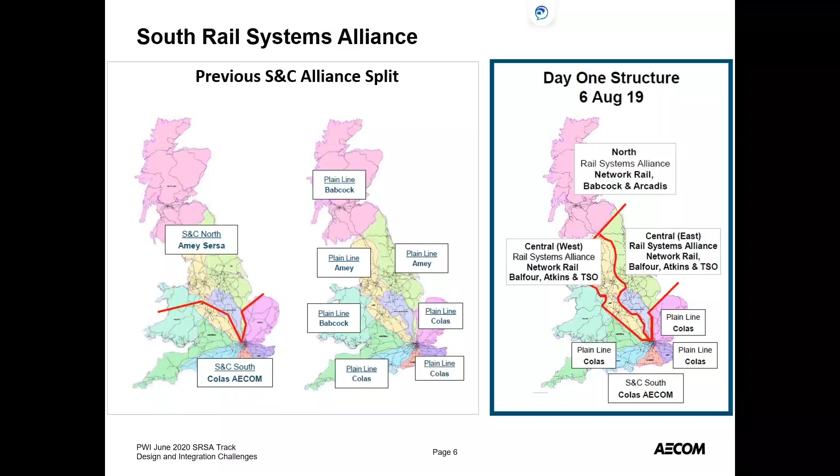However, our work bank is still pretty big, and we have a strong team to cover the area.

As I said, systems is the key there. In terms of SRSA, we don't just do track design - it's now OLE design and install, off-track works as well. We do some embankment works, drainage, EMP, M&E. So we are multi-skilled, and this is good because we are one of the teams of choice for our stakeholders due to the Alliance's multidisciplinary engineering expertise. We're basically a one-stop shop they can come to for their design and construction solutions.

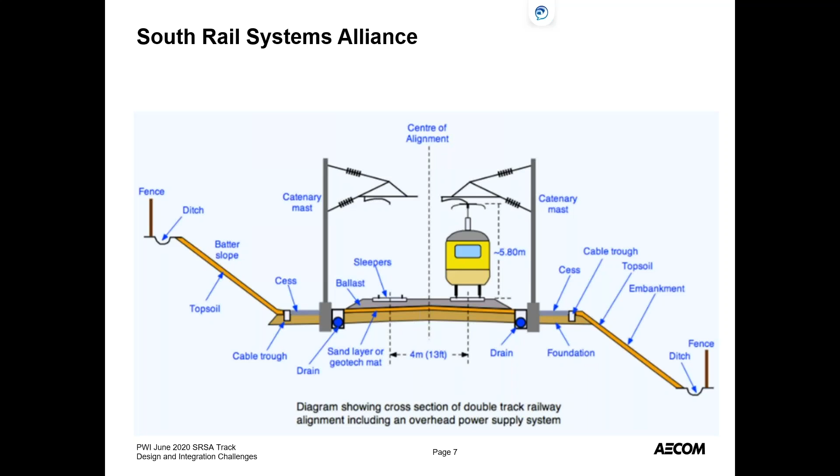We've already had 5 years under our belt as the S&C South Alliance, delivering about 800 S&C units. Our next two control periods, CP6 and CP7, the next 10 years, involve more complex track and enhancement schemes. I personally feel this is because we've tackled a lot of the low complexity projects during CP4 and CP5, and now we're tackling a lot of the higher complexity projects and enhancements going forward into the next 10 years.

Typically the S&C Alliance is led by the P-Way team, with the other disciplines circling us. So we lead signalling, civils, electrification, power, and third rail teams to produce an integrated design, again as a one-stop shop.

Quick view of our work bank - for the S&C South Alliance, when we won control period 6 and changed to the SRSA, our work bank through the control period headed up to about 553 units. That's our target going forward, and you can see by the amount of jobs we have, we've already delivered over 100 units in CP6 year 1, all successfully - there were issues, but we've delivered them successfully with no overruns. Into CP6 year 2 delivery, again over 100 units planned, and design is pacing ahead both in the west and in the east with the South Rail Systems Alliance.

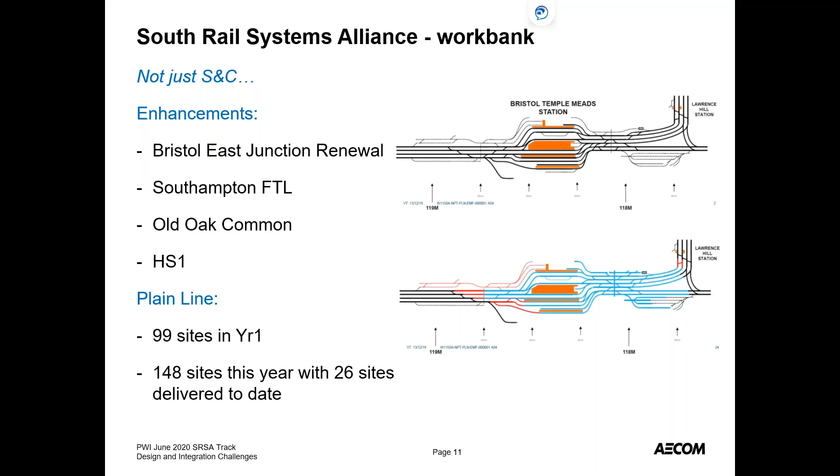We now cover enhancements, plain line, and are the team of choice for our stakeholders. Primarily we are there for track renewal, we are known for that. Where possible though, we will see if we can do some line speed improvements, some heavy refurb work as well. The term 'like for like' is used far less, and as the rail industry seeks efficiencies in delivering a better railway and putting passengers first, we need to adapt to the new initiatives our customers want.

We also provide opportunities to remodel S&C, providing greater operational flexibility and capacity, longer trains, longer platforms, and signalling flexibility, all designed and integrated as an SRSA product. So that's the background, that is SRSA. Hopefully that tells you how we have changed from how we were in the S&C Alliance to how we are now as a systems-focused delivery unit.

I'm going to go through 3 examples of projects that I've been particularly involved with to date, with some of the issues, opportunities, and solutions we have put in place to successfully deliver these projects. So Southampton Freight Train Lengthening, a project that's been happening for a while, a few years now.

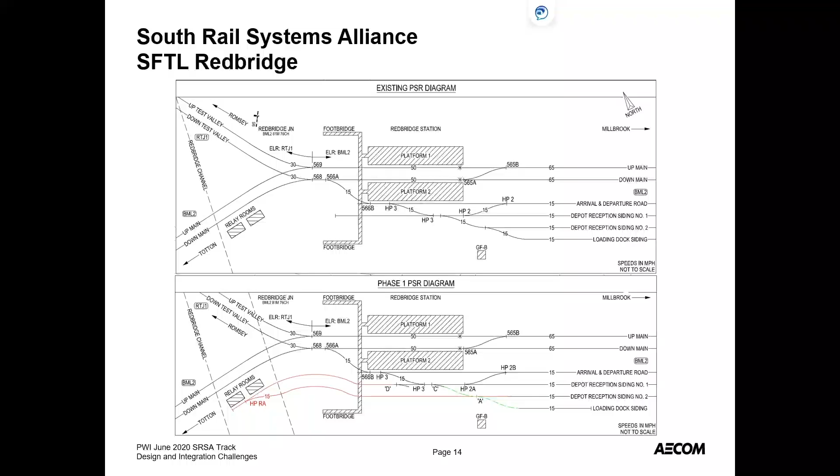To enable the doubling, there are a number of constraints, including existing land. There's existing land to the south of the site, so we had to do some de-vegetation work. And because we're redoubling, we've also had to put in new lighting columns, a new fence line, which you can see there, and as I said, the new hand points.

A bit more detail on some of the constraints we had. To the south of the existing footprint there's a park, so there's a park just to the south, and Network Rail had to buy some land to get the second line in.

Siding number 2 to the south - we had the new line, new Network Rail boundary, new fence line as well, and there's a lot of constraints in terms of space, but also existing equipment in the area. There's an existing electrical substation, and as soon as you see that, you know there's going to be some kind of cabling coming from it. And in fact, you go to site and there's a number of cable troughs littered around the area.

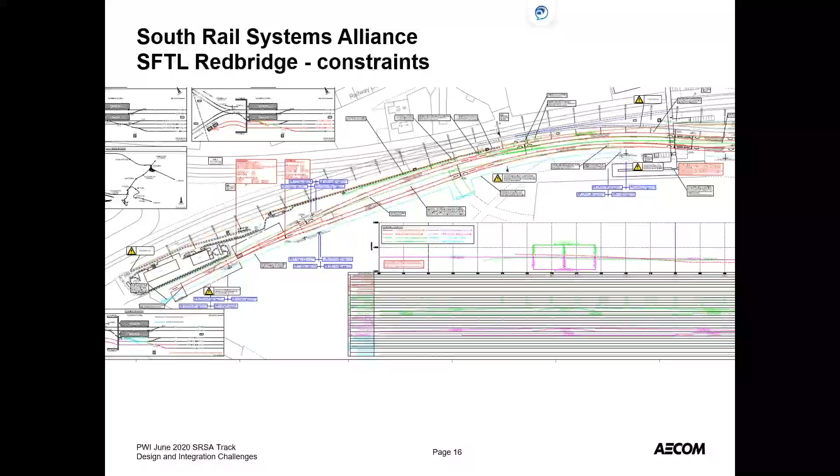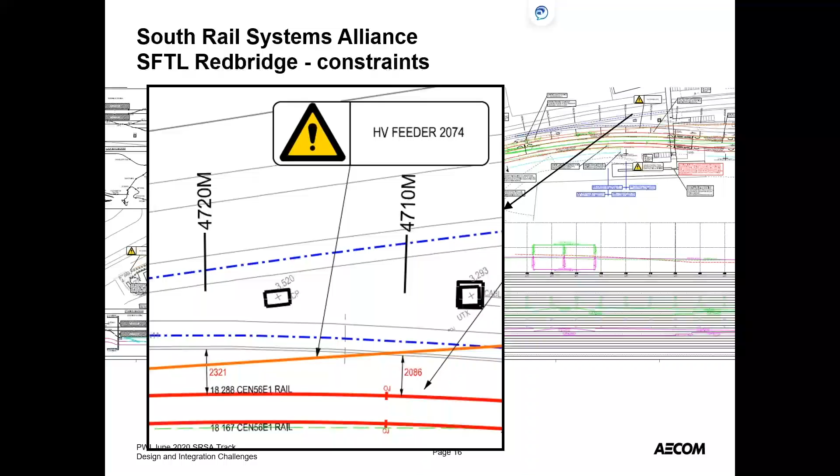As part of the Form A design, we identified that there was an HV cable running from the substation very close to the track alignment. With that, we put a hazard on, and that hazard had to be taken forward into Form B design, detailed design, and then into construction.

Okay, Paul. Okay, I cannot hear Paul. Hello, is that better? Oh, that's better. Excellent, go for it, so sorry. Goodness, cool, all right, yeah.

So what I was saying to myself just a moment ago was about Southampton. I think what's key to remember in this job is that Southampton has been going on for a number of years, with different organisations working on the design, and within those organisations different people have come and gone. So there's a lot of knowledge out there in the job, and not necessarily all of it stays with individuals. It's about the importance of documentation.

This issue was identified, and rightly so, in the Form A documents prior to me joining the company and taking the job on, but did result in some issue at the end. We did a bit of an inquiry internally to work out what we could have done better, and I thought I'd share a couple of things with you on that.

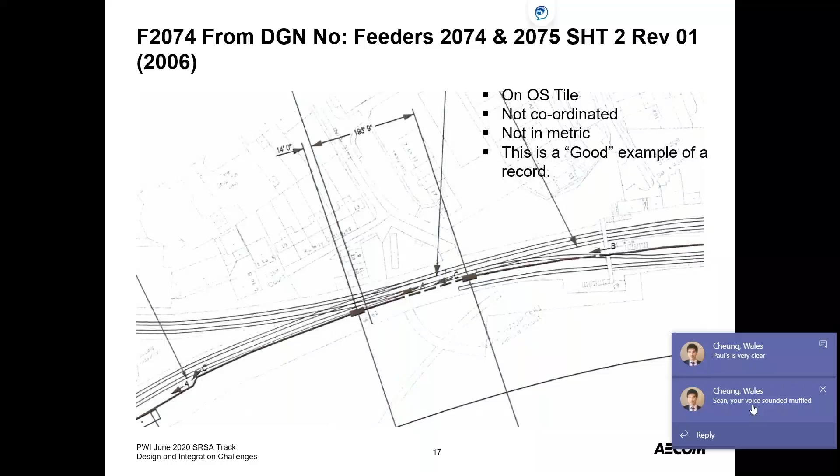Now, the issues with record drawings, especially as you move away from signaling to some of the other power disciplines, is that record drawings... Sean's taken away my presentation. It's all good. Record drawings are only as good as the people drawing them at the time. Signaling is quite critical - they're all critical, but signaling is significantly critical.

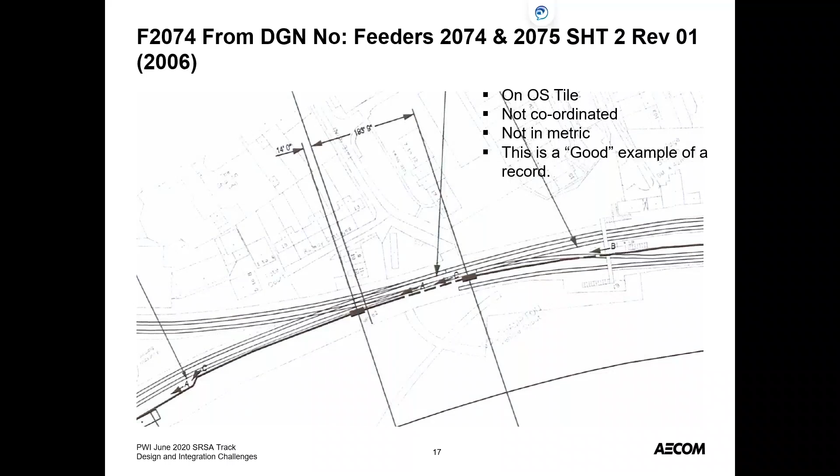The quality of the records varies depending on age, but they can be very, very good, and we do a lot of correlation to make sure they're totally spot on. With some of the power records, they can be good, they can be bad. This is considered in the discipline as a good example of a record, but even so, it's only on an OS tile. It's not coordinated. The geometry is still in feet and inches, and it's not really what you need when you're trying to measure things to the millimeter.

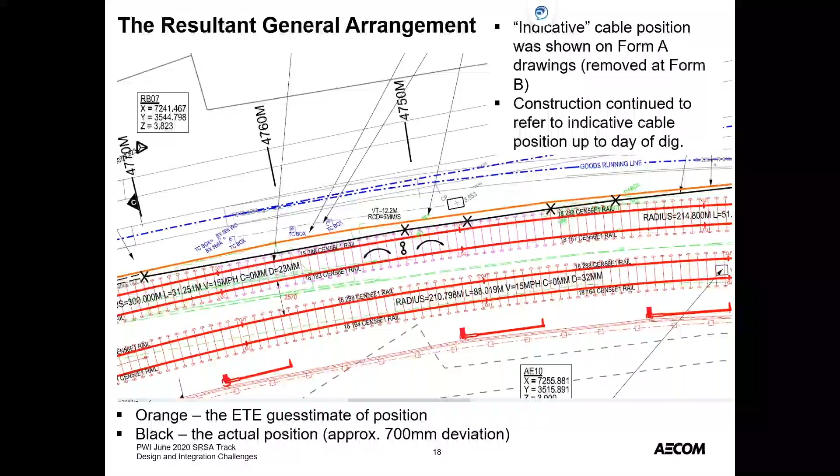So, in good faith, we had put the position of the cable, marked in orange, based on the record information. The line in black represents the actual physical position of that cable. The cross marks are where we eventually dug it out to find exactly where it was, and those are the positions we surveyed on the cable itself. You can see there's a bit of a drift - about 700 mil, 600 mil towards where we want to put the new track, where that cable was actually found. As track engineers in particular, millimeters can make the difference. As it was presented in orange, it might have been something that could have been avoided - you can limit the dig off the sleeper ends and potentially avoid the issue. Where it was actually found was within the ballast shoulder, and action needed to be taken.

So for us, we raised a close call against the design because we needed to understand how we got to such a situation so late in the day. A couple of things came to mind when we were looking at that.

In the event we had not undertaken those investigations and we'd put a bucket through that cable, it would have been a reportable accident and would have probably resulted in an HSE investigation. But beyond all of that, we could have run the risk of seriously hurting or killing someone in that action. As a slight aside, if you go to the HSE website, there's a brilliant video showing what a cable strike can do and what it looks like - it's not pretty at all. So burns would have been the obvious injury all the way up to death as a possibility had we not taken action prior to this moment.

If you think about the impact on the system, we've been talking a lot about systems. We're no longer a track renewal outfit. We are responsible for the entire system. A cable strike, had that been a signaling cable or a telecoms cable, could have caused significant disruption over a large geographical area. And there's third-party telecoms to be considered as well.

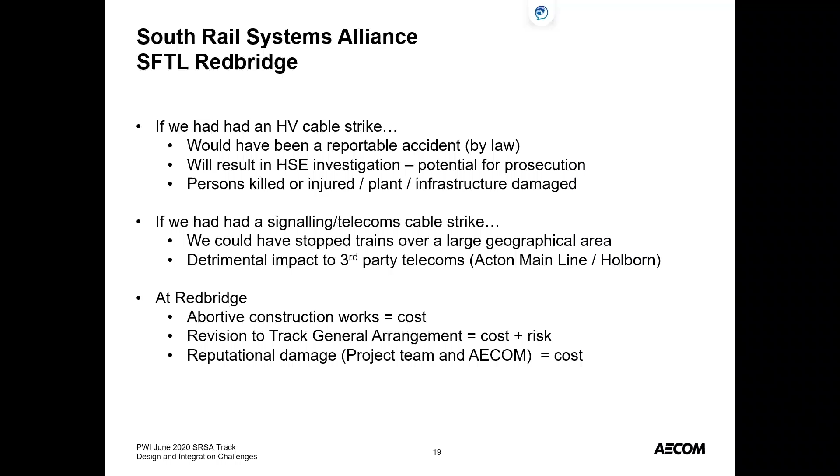And then there's reputational damage as well. When that came up, I am accountable at the time because I was the CEM. It is my fault. People said some words to me, and in the heat of the moment, they were totally valid. But it's about reputation. So the old adage of measure twice, cut once, definitely applies. Check and check again. So if we could go to the next slide.

So the lessons learned kind of bear that out. BIM and CAD ownership, it's just something we still debate this internally in the Swindon office. The track drawing has always been referred to as a general arrangement, and dependent on the complexity of the jobs, we end up picking up other people's details, and rightly so. So a cable detail, as we were showing, that would probably sit right on a track drawing because it has an impact on the track activity. But we find ourselves as track engineers the custodians of a general arrangement that takes into account everybody else's design elements.

And again, as we move from being a single discipline activity into a systems activity, we've had to rethink our BIM and our CAD strategy to say, well, do we need to, for smaller scale projects, be bringing in like a Master 500 or some sort of global referencing model to be able to manage these issues rather than it all sitting in the track design. That's something we've been looking at going forward to try and avert these issues. Again, geospatial correctness is absolutely critical. It's a millimeter science with a lot of what we're doing, and we need to make sure things are correct that go into these models.

And again, we must resist the urge to show uncorrelated information. Everyone feels it's the right thing to do, and it is the right thing to do to highlight these risks. But as I've put a point a couple of lines down, if you think about advertising, advertising is so powerful. You can stick an image up on a tube, or on a station platform, or on a bus stop, and that image, whether you're consciously taking that in or not, it goes in your head. And it can affect how you think and how you see things. If advertising didn't work, they wouldn't do it. It clearly works, and it's very powerful.

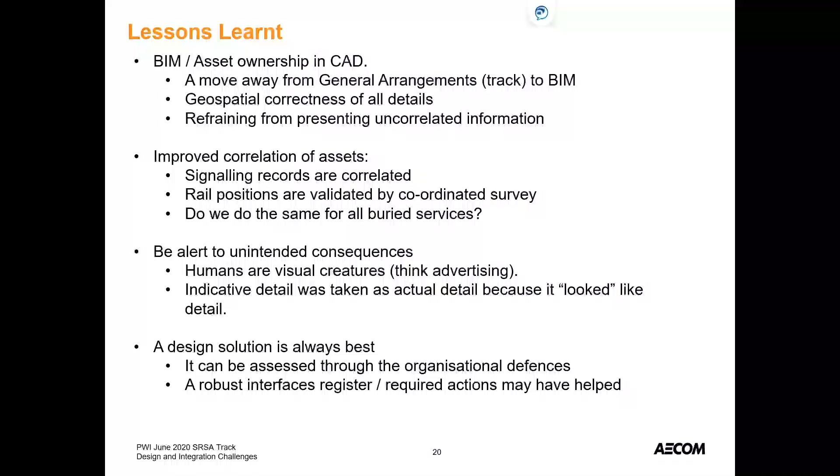Okay, so that's Southampton. As I said, lots of lessons learned from that that we've taken forward. The next project is Newport Station East. This is about good design versus compliant design - two different things that came out from Newport for me. So Newport Station, let's hopefully go to the next slide.

There we go. Okay, so Newport Station, this is a job that we installed at Christmas - two crossovers and a lead. All in NR56V.

Trying to do a like for like, in inverted commas, on through bearers, but not modular through bearers. We're allowed to do some alteration to the layout, but we had to also stick with the signalling system and current operational moves - they had to be maintained. We had to do some line speed changes to accommodate the track alignment, to improve the track alignment. The biggest issue or constraint we had was integration with the Great Western Project, who was still finalising commissioning of the electrification through to Cardiff.

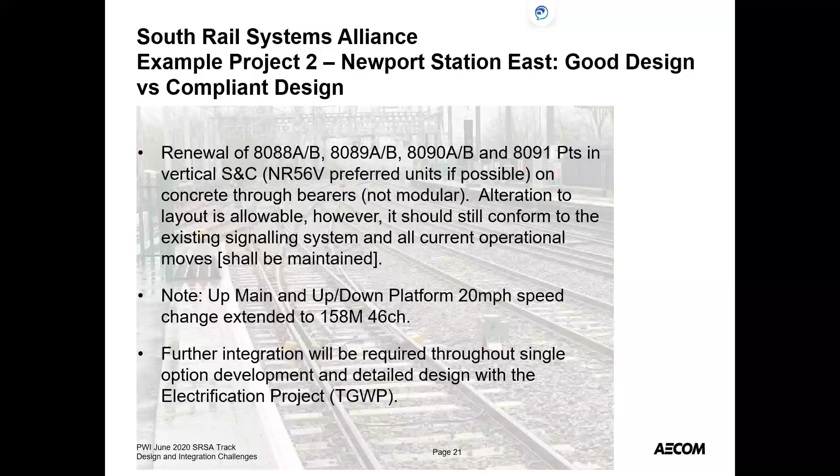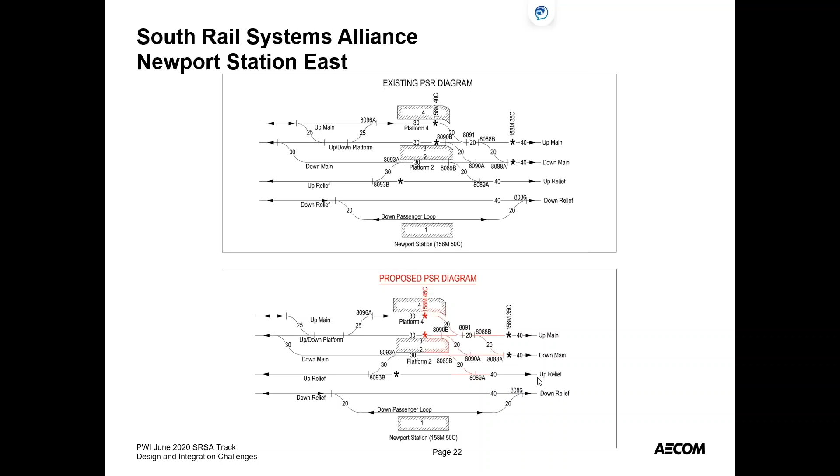Okay, so worth keeping that in mind. So although we're allowed to do some alteration, actually we are constrained. Existing and proposed PSR diagram with Cardiff is to the west, Bristol to the east, and work was being done on the up main, the down main, down platforms - so up main, down main, up and down platform lines, platforms 4, 3, and 2 respectively. So the only material change was the movement of the speed boards on platforms 3 and 4.

Okay, so go back to the constraints. The Great Western Project early, as I said, big constraint. And the layout itself is a checked track layout - there are check rails through the platforms due to the radius. We have a number of follow-on crossovers existing as well, but the design is follow-on crossovers, and the signalling constraints were actually quite tight to the point where we basically had to put in a derogation for some clearance, for a clearance point between 8091 and 8088B.

The Great Western Project had a plan to commission mid-December 2015, which pushed other constraints or unseen constraints in terms of design. So they had some test trains they were running prior to core possessions. They had to finish off doing their wire installation and fine tuning of the wire positions. And we had to obviously integrate our track design to what the Great Western Project were going to do in terms of the OLE. And they kept hold of the source records because they were the dominant project.

Other physical constraints - retaining wall on the north side of the railway and Thomas Street underbridge. Again, we tried our best, and we did try to ensure we didn't have to do too much renewal over the underbridge. So gives you the idea of some of the seen constraints and the unseen constraints we had to deal with.

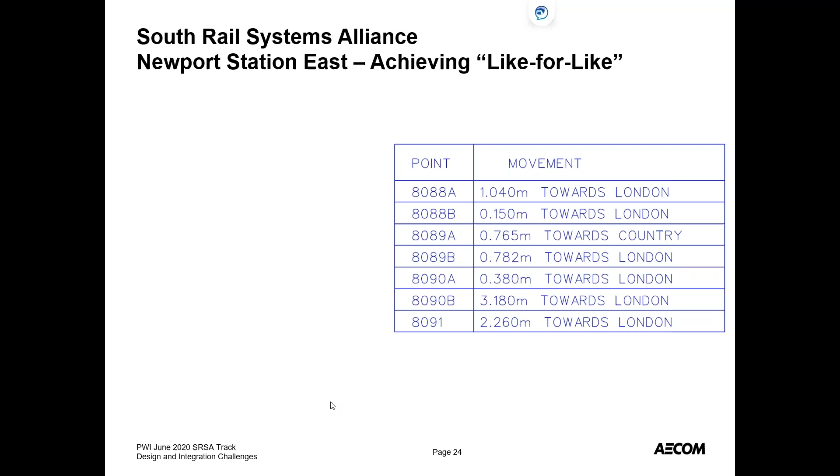So with that, we tried to do a like for like renewal here as best as we can. And you can see from that chart there, the toe movements were pretty minimal. The two biggest toe movements we had there were 8090B and 8091. So I'll go back to that.

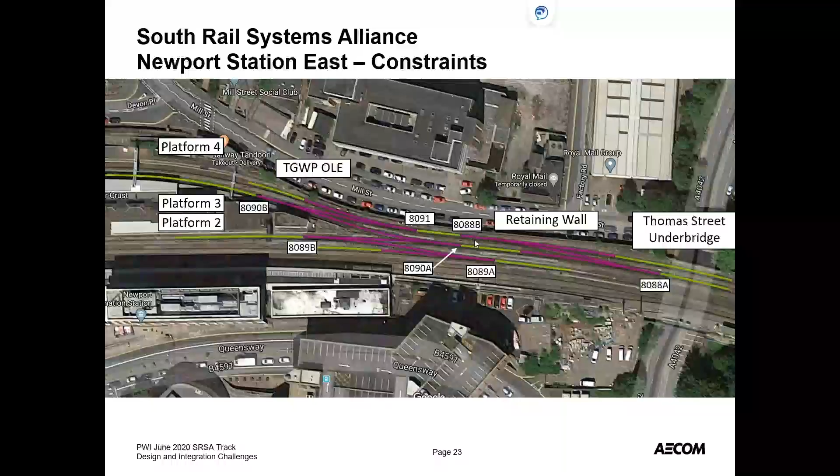Okay, so 8090B in platform 3, and 8091 just to the east of platform 4 on the up main. Although they look small movements, they're considered minimal in terms of signalling and OLE interfaces. And we also had to ensure we kept minimum movement because of the OLE. The project team actually managed to value engineer the requirement for 4 number OLE new structures on top of TGWP structures, 4 new structures, and we managed to reduce that to 0 structures through the design.

Because this would have been additional cost that hadn't actually been accounted for, and time accounted for within the renewal.

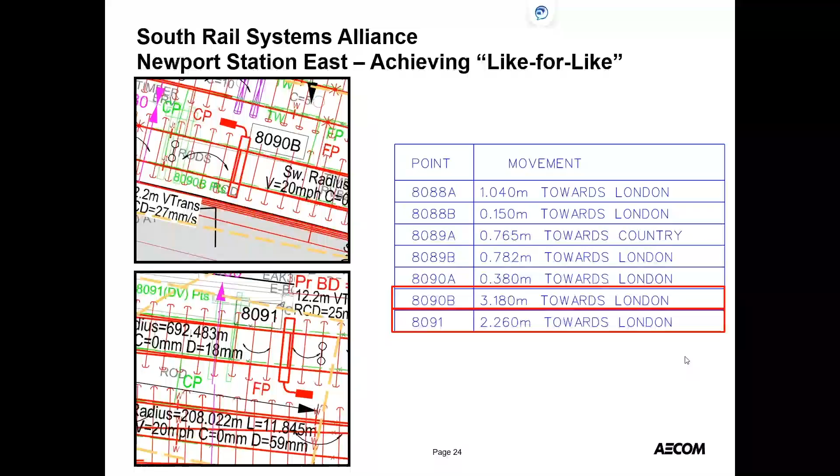Okay, so that gives an idea of the toe movements, 8090B, 8091s, and the minimal toe movements to accommodate the design.

So, a bit of a larger cutout there of the GA. Okay, so there's crossover 8090B through to 8091s.

And what we try to do here is limit the impact to the platforms, okay, platform 3 and 4, ensuring that adjacent turnouts also could be fitted.

8090A on the up and down platform, that was fixed also generally to the OLE. But we also had to obviously ensure compliance to the track standards 2102 and 2049.

The other thing we had to understand was the crossover, the usage of that crossover, and the passenger comfort. And I think here was where it was called a crossover, we should have taken more note of - actually this is really used more as a through route than a crossover.

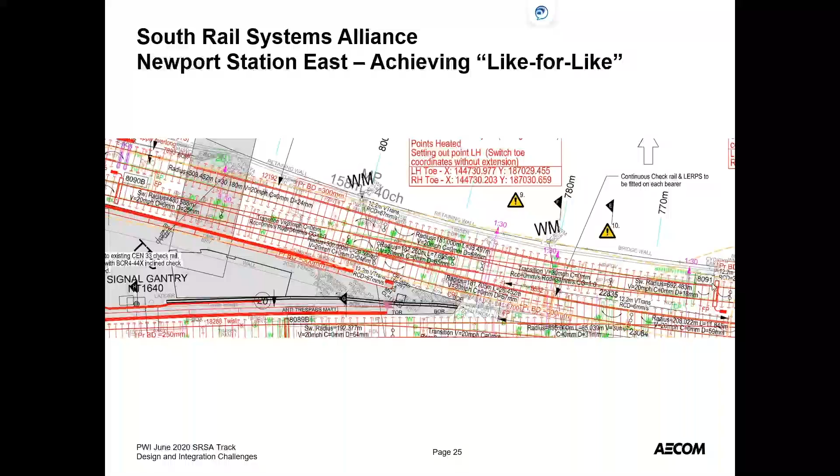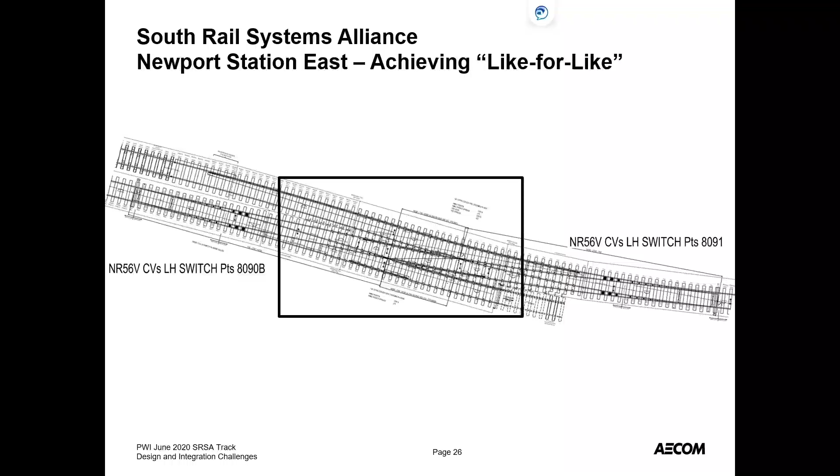Coming to the manufacturer's layout, so that's what the manufacturer's layout looks like, and you sort of zoom into it, and it looks great. They're both left-hand switches, which again should have raised a few eyebrows when we looked at the alignment.

And another blow up there of the layout. So we have two similar flexure left-hand turnouts into contraflexure - sorry, a similar flexure turnout into contraflexure left-hand turnout, and zero straight elements on the through route, giving us back-to-back transitions and reversing radii.

So with this, we should also have had a view on how the turnout will look and ride. Looking at it on paper, you look at it and think, okay, it's compliant, the design works. We're to 2102 and to 2049, and all of the calculations work, the maths work for that layout. But on paper, you cannot really understand how it looks and how it rides.

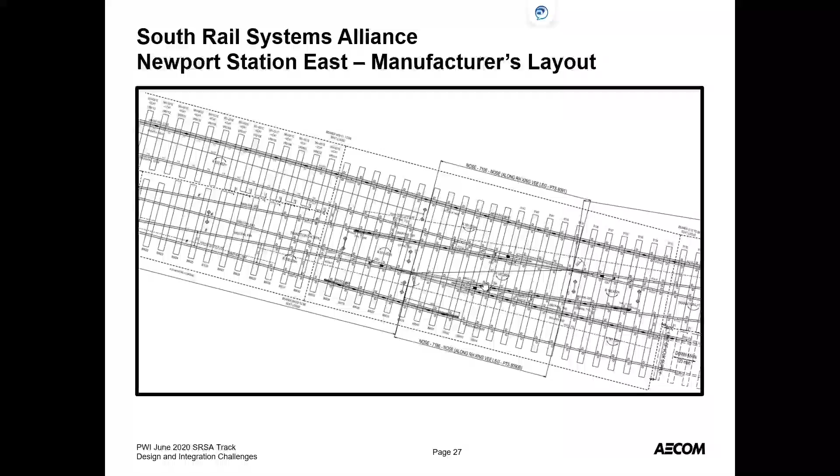So you look down that, you've got one transition from the turnout going into a crossing, and a transition just prior to the crossing. The PE rightly asked for a check to be immediately done while she was at the manufacturers, just to make sure, number one, we had provided the right P-way design model, and we do a proper check of the geometry through there.

Okay, so we got onto that immediately and found actually it is correct. What we've designed is right, it's compliant, and we've provided the right information back to the manufacturer.

From this, we decided that we need to learn from this - lessons learned and a design response - because we had to present something to the customer, the RAM, before it was installed. Again, it's compliant, but we need to show what design decisions we've made to come up with that layout, which we did. We put something very comprehensive, which went into the Form B, back to the RAM.

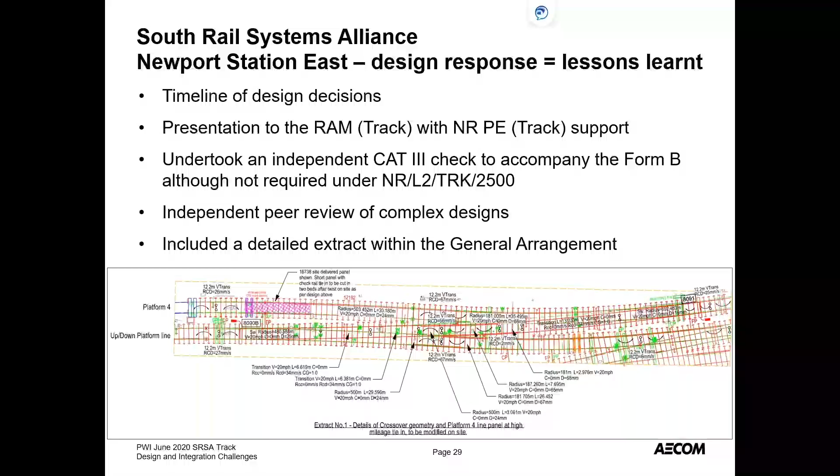Okay, so that's something we've learned from this is, don't take it as given because the geometry works that you're going to have a good design. Maybe compliant, it doesn't necessarily always mean it's good. And one thing I learned from this is don't turn up on site and expect it to be any different.

It rides. It does actually ride well because it's probably going slower into the platform. And actually, in the end, you look at it, and it's a good job. But again, compliant design versus good design. So that was Newport.

Let's get to the next slide. There we go. So this is the final one, I seem to do all of the Wales jobs. I do enjoy the Wales jobs, to be fair.

This is Cardiff Station East, which was put in the ground in April, finishing May. The Cardiff East S&C renewal is again a like-for-like renewal, quite straightforward - a crossover, a single lead, and plain line - along with some platform works to achieve compliant cross-falls in the vicinity of the track design at the platform.

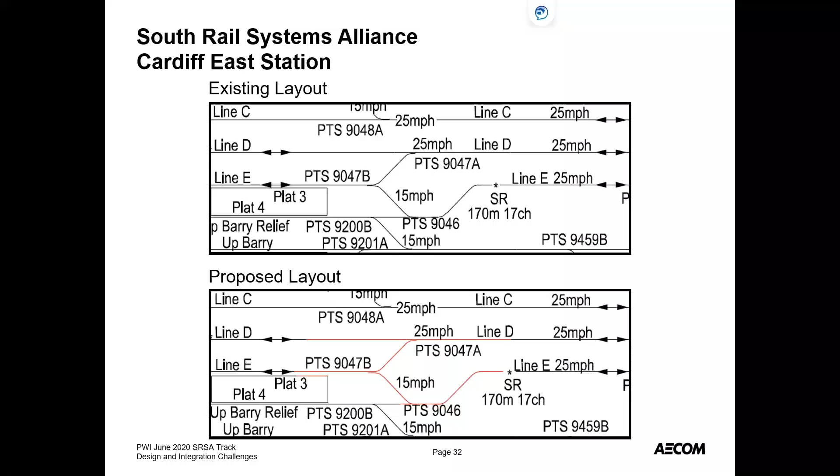This just shows a visual of the constraints. So we have a number of underbridges - Penarth Road underbridge, West Canal Wharf underbridge - the 9200B S&C, which is an existing recently renewed lead we had to tie into, and platform 3. Our work for 9047A and B and 9046 was on lines E and D, with line E going into platform 3.

Penarth Road underbridge is a girdered underbridge - you can see the girders in the photo - but it also has no ballast step. Although we could do some lift there, we were constrained by the platform tie-in and by trying not to do work over and above what we were scoped for through the platform. We did a number of trial holes through Penarth Road underbridge, which gave us our result for the ballast step and also gave us an understanding of the underbridge construction type.

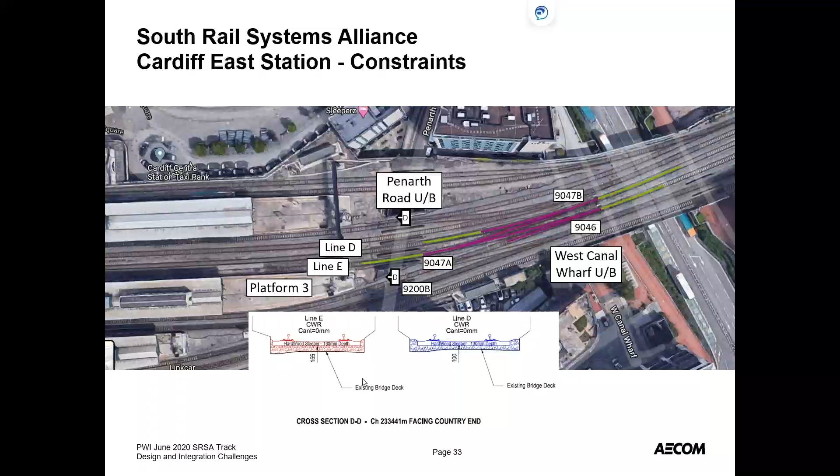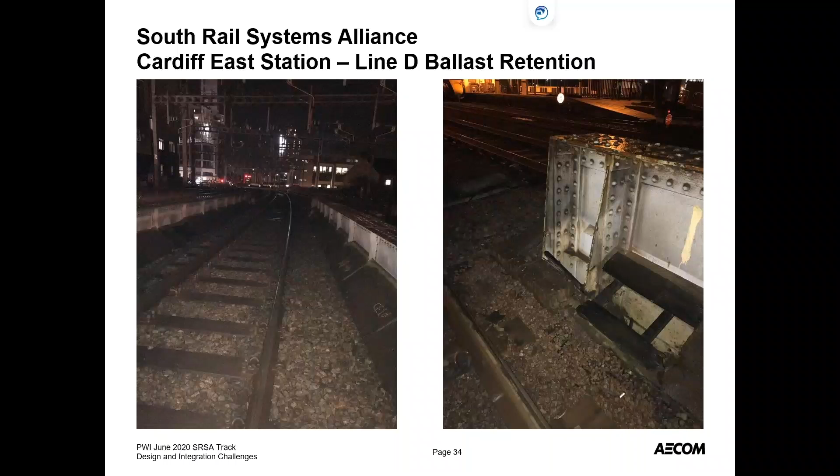Clearances through line D were very good, but it was noted, especially on line E, that clearances were not as good. There were additional elements to the underbridge too - as you can see, there's a bit of a brick wall, some brickwork just beyond the girders through line E. So line E had two issues: it was very tight, needing to lift the ballast depth slightly, and the existing clearances through there were very, very tight.

So with that, we needed to do some more investigation, especially in terms of how we were going to put the ballast retention back without compromising the clearances, and what effect any lift would have on the bridge and the ballast retention system.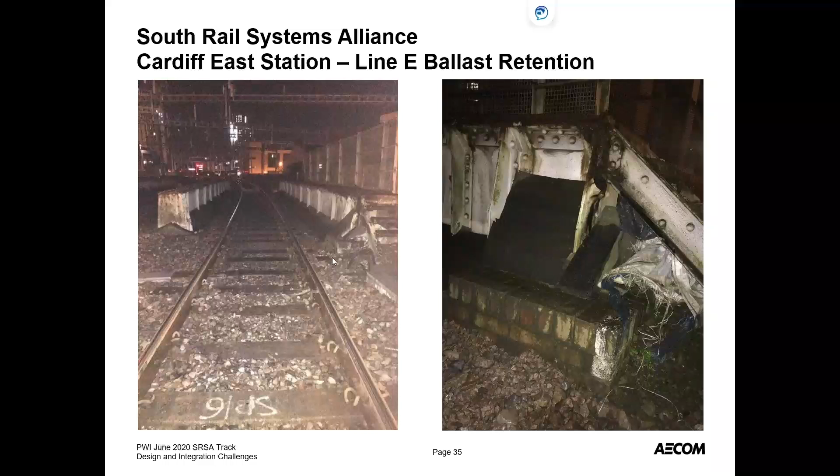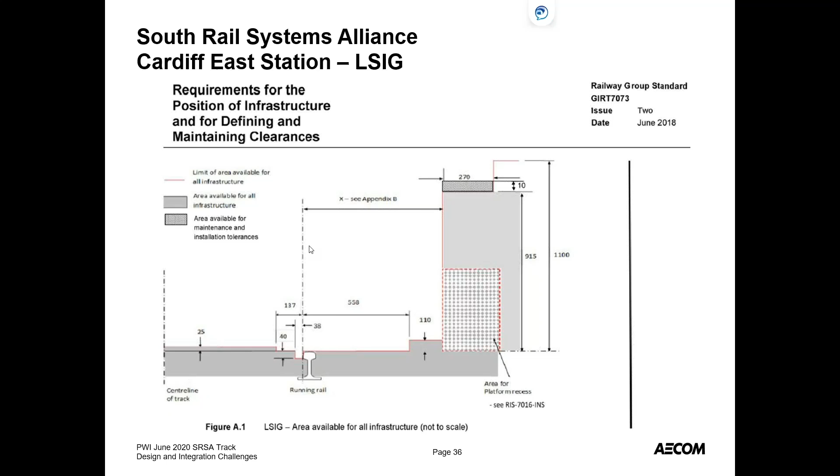For this, we went to group standard 7073, for positioning of infrastructure and defining and maintaining clearances, and looked at this in terms of the lower sector infrastructure gauge. So the track designers provided the civils designer with this key criteria: ensure that the ballast retention system sits outside of the lower infrastructure gauge. That was one constraint for their design, and we also ensured they understood what we needed for track design and for clear route to satisfy maintaining clearances through there. So we gave them key criteria to design the system to.

The design that Civils proposed was similar to an existing design on adjacent line C. This is where a plate is placed vertically against the girder stiffeners, with a diagonal grating going from the top of that plate, attached with an angle cleat, interfacing back to the girder. So we decided to adopt that solution - you can see that there in red. We felt we knew enough about that bridge to say yes, that solution will work, keeping the new plate system, the ballast retention system, outside of the LSIG.

With this, though, we had to also consider tolerances. Civils construction tolerances are in excess of track construction tolerances. As track people, we work to millimeters. Civils, not so much to the millimeters, maybe to the tens of millimeters.

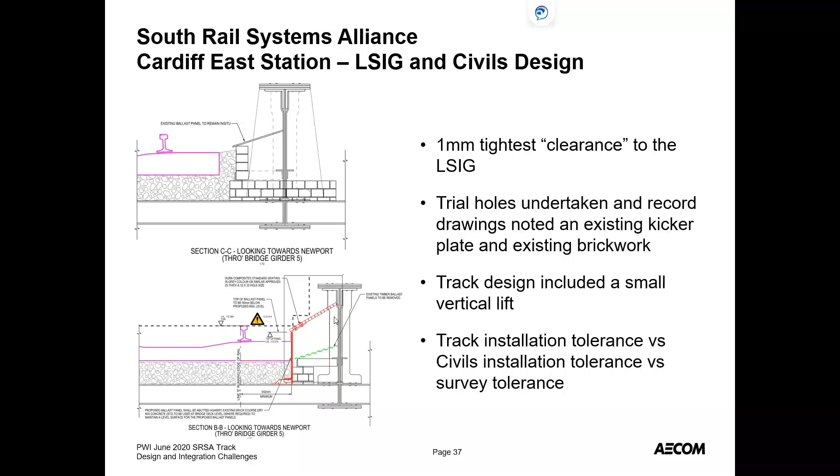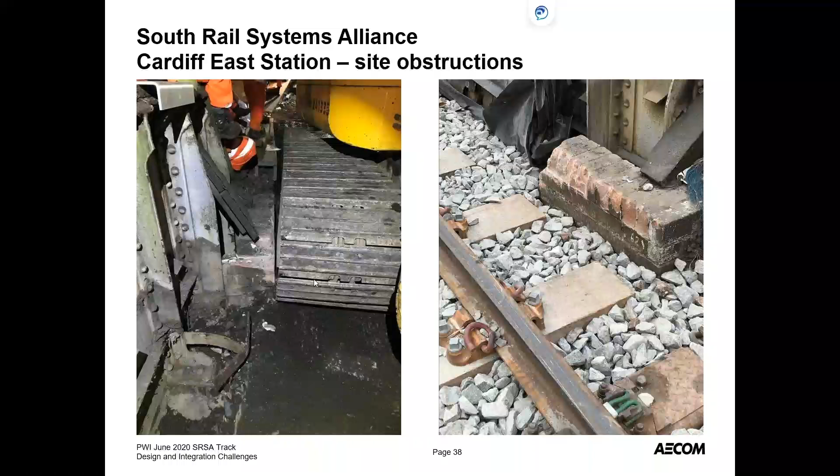Some of the photos from the day of the works: a number of obstacles were encountered during the work, including the brickwork. Although we knew where the brickwork was and that it was below and out of the way of LSIG, what hadn't been taken into account was physically getting a machine through there. That was tough, and it delayed the program to get the machine in and out through the bridge. But the other issue was the closeness of the end of the timbers to the bridge as well as the brickwork. We did find a solution in the end for both, which I'll come to in a second. But these are things that we found on the day.

As I said, we did a number of trial holes, and we actually went back prior to the core works to do additional trial holes because there was opportunity to do it. And we still didn't find some of these additional obstructions, which caused some headaches during the dig.

There was only one opportunity after this to get in - these were the core works where we wanted to put the ballast retention in. The other opportunity was the weekend after. So as an alliance team, we got all the designers and construction team together and said, right, we need a solution that will solve this issue.

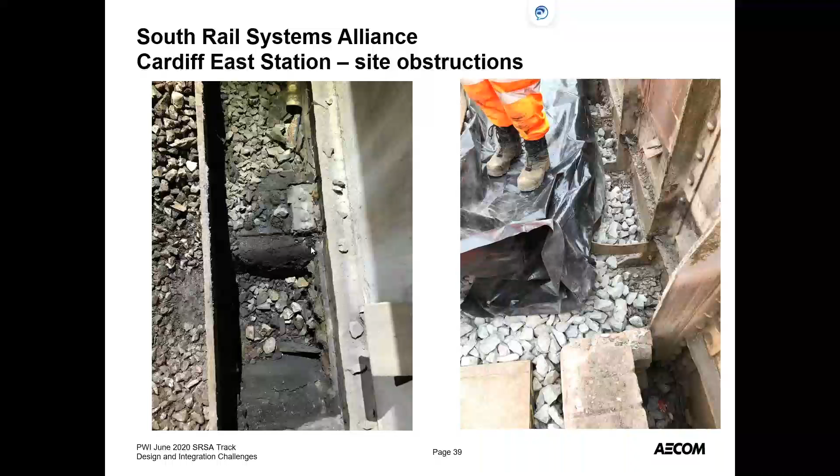More on that - there was corrugated plate that we found above the deck. So we revised the ballast retention design, again making sure we kept to the key parameters and criteria that track specified. And the solution was actually very good. We managed with this solution to put the plate closer to the girder, thereby improving the clearance through the bridge girders. The design also had to take into account the additional lateral force and track resistance,

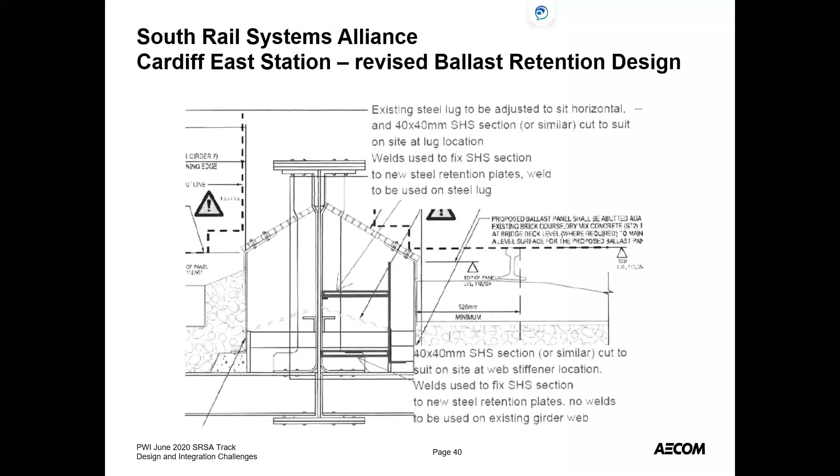because this was going to be track that was going to be stressed throughout the bridge. So we used some SHS sections, square hollow sections, steel hollow sections through the girder, and utilised some of the existing lugs on the girder as well for some extra lateral force resistance. And that gave us some additional clearance to the girder.

We obviously had to do our inspections post core works just to ensure that when we stressed it, it was okay, there was no movement, and it's sitting fine. And I'll say this for me was it was an exercise in getting an alliance decision on how to deal with the issue.

So what we learned: undertake more trial holes, do some trial holes and then do a bit more, just to be sure we're absolutely satisfied we understand what the existing situation is. Peer review of civils designs to ask non-civils questions. So me as a track man, I was a CEM for this project, but I actually sat and studied the civils designs, and I came back and asked questions from a system and track point of view rather than a civils point of view, especially in terms of the clearances and how we assure the track PE and the DPE

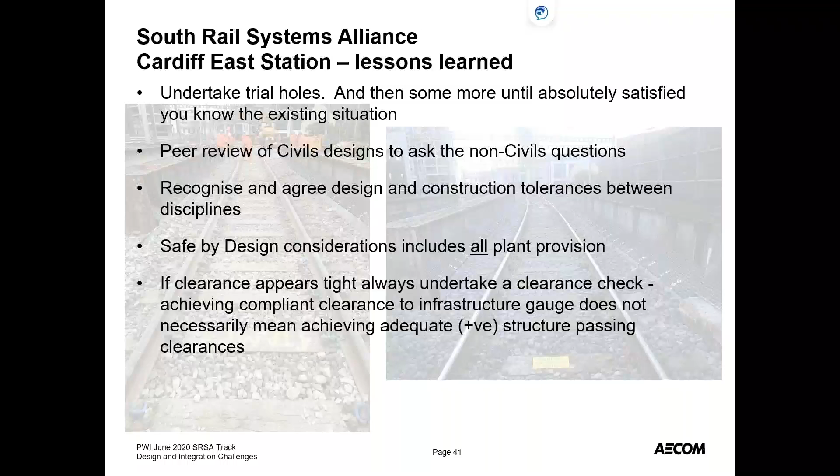and the team that the civils have taken into account what the track is doing and how the track is designed and performs. Recognise and agree design and construction tolerances, as I said earlier, ensure they're agreed and implemented in the design appropriately. Safe by design considerations should include all plant provision. Again, we as the Alliance missed the plant that had to traverse through the structure. This is now something that will be taken into account going forward for all of our projects. And if it appears tight, do something about it. You may say it's low and out of the way, but actually it's always worth doing a second check to make sure you have got a compliant, positive, structure passing clearance in line with 7073.

Something else we have started doing on most of our sites now is a clear route as-built gauge analysis prior to opening the line. We won't wait till the next possession. We'll get in there, during the core works, receive any of the laser sweep detail, and carry out the clear route analysis, and provide that back to the team to give confidence that we can open the line safely back to traffic.

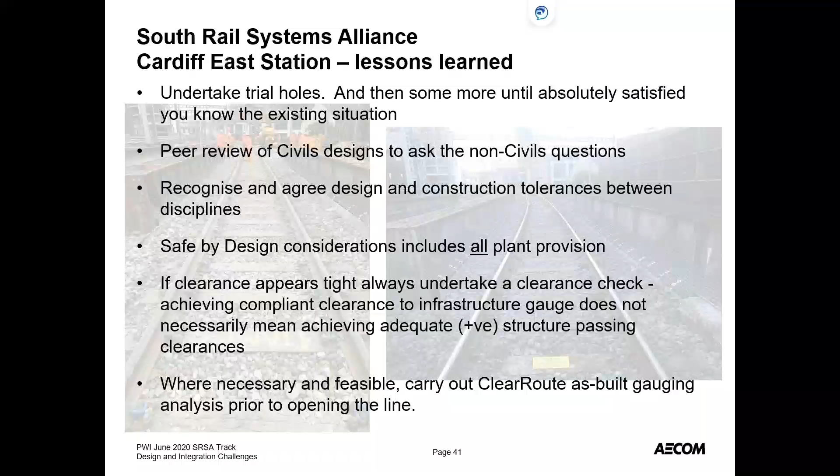Okay, so that's it, thank you for listening. Just an example there of some of the pitfalls, but also the opportunities and solutions we have done as the Alliance. As I said, 32 years in the railway, and I am still learning, and hopefully some of the stuff I've shared with you is new learning opportunities that you'll take on board. Okay, thank you for listening.